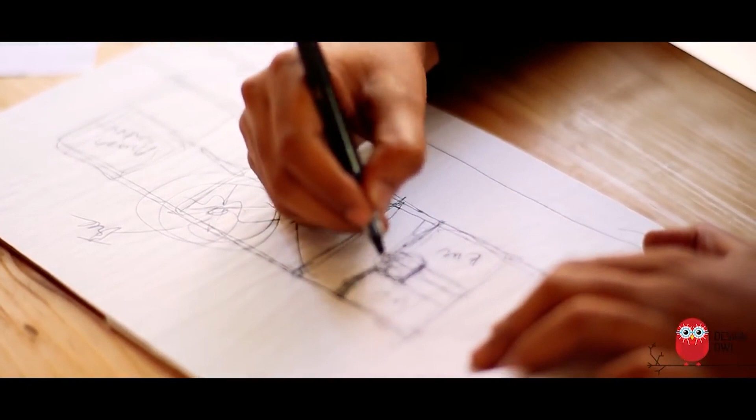The most sustainable architecture that we have resides in the villages, because there are no architects who go and design those buildings. It's just the users—they respond to the climate, they respond to their needs. So this whole prototype really responds to the city's needs.

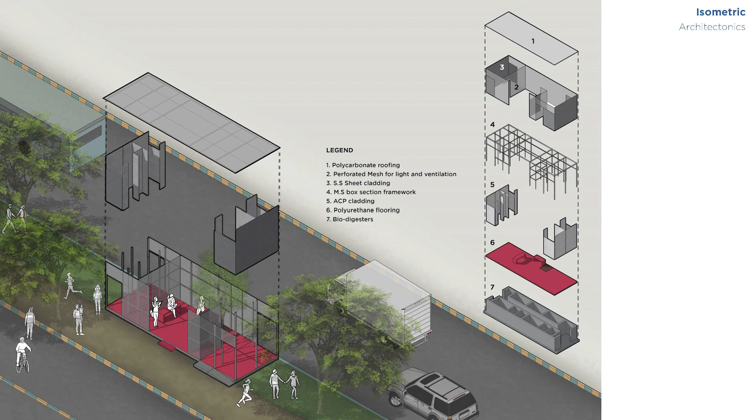This diagram here represents all the layers that went into making this prototype. Due to the success of the prototype, the corporation decided to build 14 more such units within the city, each within a radius of 500 meters from one another.

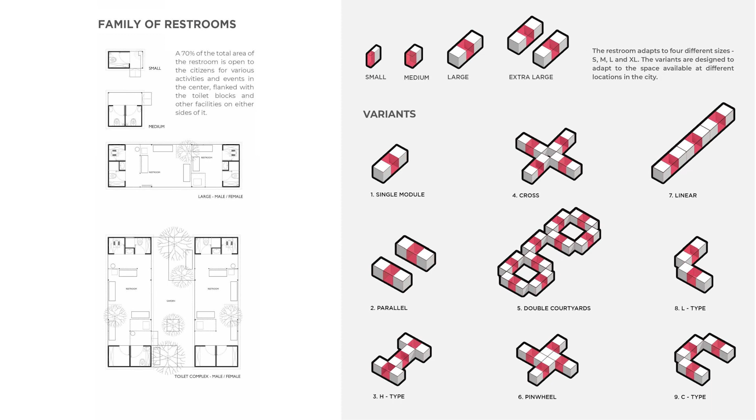As a result of these conversations, we decided to make a family of restrooms with small, medium, large and extra large variants. Based on the space available in cities, we could modulate each of these prototypes. The restroom variant could take many forms with the basic idea of a central garden comprising 70% of the total space. These variants could translate to any public facility the city needs, like a bus stop, a Gram Panchayat office, or a post office.

This resulted in another design for toilets, the Light Pavilion, with a similar kit of parts like the Lightbox. This prototype was designed for the local station platforms of Bombay, one unit on each platform of the suburban station. The proposal had a similar spatial narrative, like the Lightbox, with perforated metal and metal structure.

In India, community spaces often seem to be incidental. The stepwells and baolis, for example, serve as spaces designed to fetch water, but the elaborate architecture itself provides for conversations among its visitors. Our learnings from these spaces were about visibility, porosity, and the potential of design to provide for community interaction while catering to a simple function like fetching water or even using a public restroom.

The next project, Pause, is a building that sits as a marker along the Bombay-Goa highway, communicating visually to passersby. With multiple access points and signages allowing visitors to select their access points, with dedicated entry to the male toilet that streamlines the circulation, making it easy for maintenance.

The interiors are very porous with plants along the edge of the urinals. The openness allows the odor to escape and dries the toilets quickly. The entry to the female and differently abled toilet is close to the front facade, so they don't have to navigate deep into the site.

There is a similar planting detail along the edge of the basin and nursing station. The truck driver section has a Suvidha Kendra, tuck shop and a recreational space supported by toilets, washing and bathing spaces. The recreational space is semi-open with a charpai that makes the user comfortable to occupy this facility.

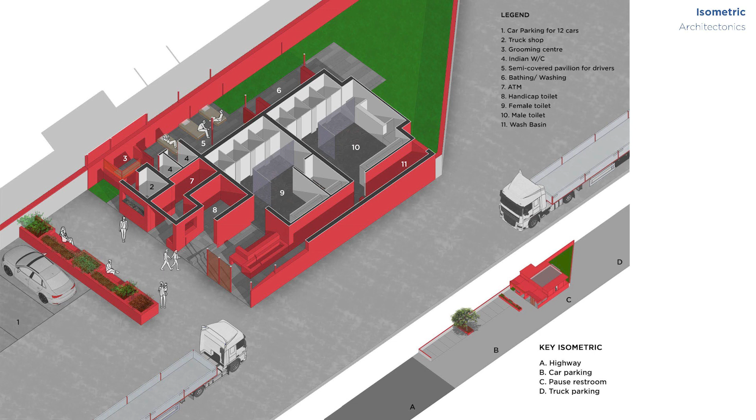The side elevation of this facility has a flamboyant facade where the form is responding to the function. The isometric here shows how all the activities interlock with one another in a manner that makes circulation easy for different user groups. This facility has a dedicated staff which looks after the building, which is a very important component for sanitation projects.

Another idea that emerged out of this narrative is a community sanitation prototype, which we had proposed for the smaller districts of Calcutta.

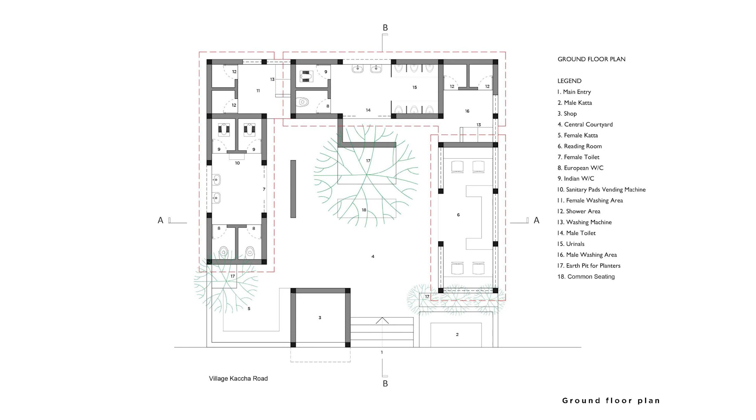Along with toilets, these prototypes would offer separate spaces for male and female for bathing, washing and drying clothes. A reading room with a central garden along with dedicated open spaces for men and women with a tuck shop facing the street. The open space links all the activities together.

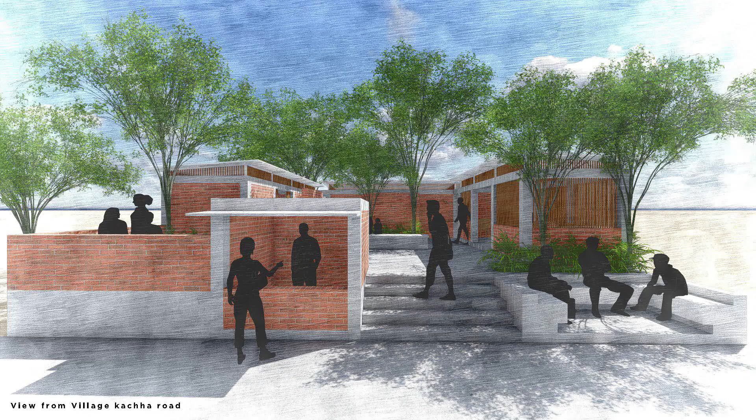In section, the roof gets detached from the walls to ensure good ventilation and lighting. The tuck shop forms the elevation towards the street, along with the steps and public spaces for men. After the public edge, one arrives into a garden surrounded by brick walls that has several access points.

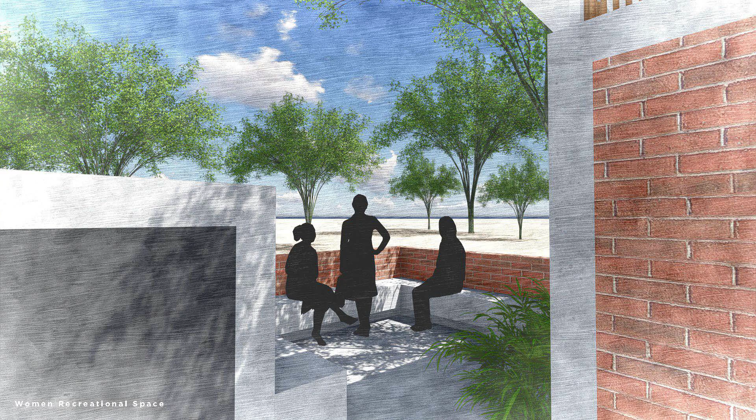The edge of the garden has a library or a reading room, a recreational space for women, and hidden access points to toilet blocks. All of these functions converge to the central garden, which also holds the floating population during peak hours.

The excerpt here is from an article called The Toilet, A Philosophy of Releasing by Jean Lee, where he talks about how architecture throughout history has been a rich expression of human lives, while the spaces for our releasing have been consistently dull, anonymous, and lacking artistic expression.

In this context, I would like to talk about the importance of addressing the user group in a sanitation project. A public toilet in a village, for example, which will be used by a community of farmers, would definitely be different architecturally from the one in a city.

We explored these ideas of responding to specific user groups to shape up the architecture and give the space a human-centric expression. We studied the truck drivers community as a user group and defined a proposal which would accommodate living and sanitation facilities for them.

The video shows the context in which truck drivers move constantly at a stretch of 22 hours with no pit stops and spaces to rest or rejuvenate.

In 1982, for every 1,000 trucks, there were 1,300 drivers available. This number reduced to 750 by 2012 and is predicted to come down to 450 by 2025.

This is a process of how the building was conceived. The site is divided into three parts and the triangular spaces are used for parking.

The middle space is used for a fuel station and an amenity building. The amenity building is a triangular form which is further divided into smaller squares, each forming a house that offers different activities: to eat, to relax, to recreate.

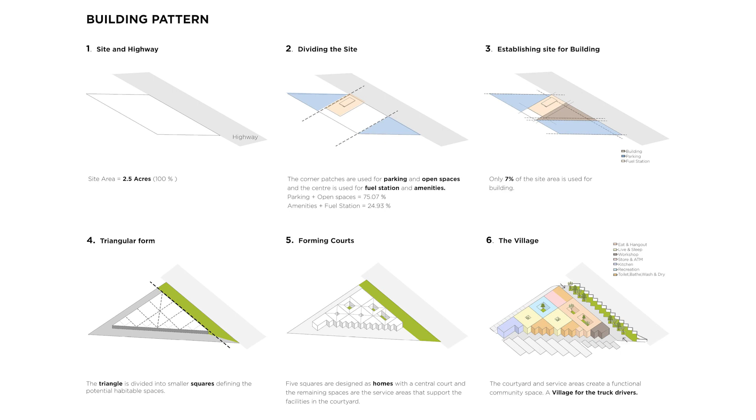This forms a collection of homes, a village for the truck drivers. The plan is a complex geometry that comprises many courtyards that hold all the supporting facilities.

The gardens inside the courtyards are designed with huge boulders and discrete vegetation to create a microclimate and to reference the landscape of Chitradurga, where the site is.

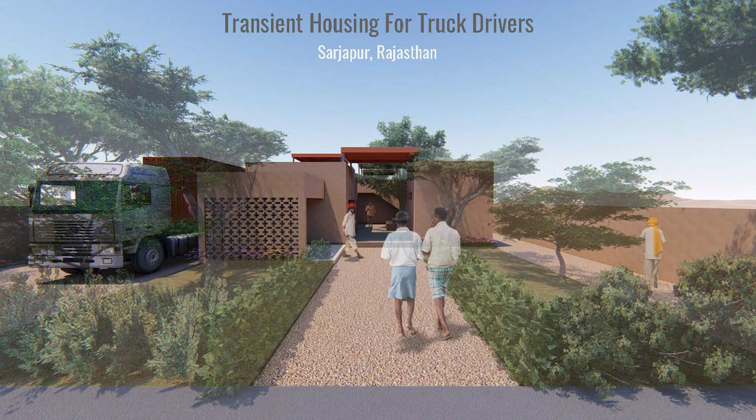The transient housing for truck drivers is an outcome of the facility we designed for Chitradurga. This project sits on a narrow plot measuring 50 feet by 500 feet in Rajasthan.

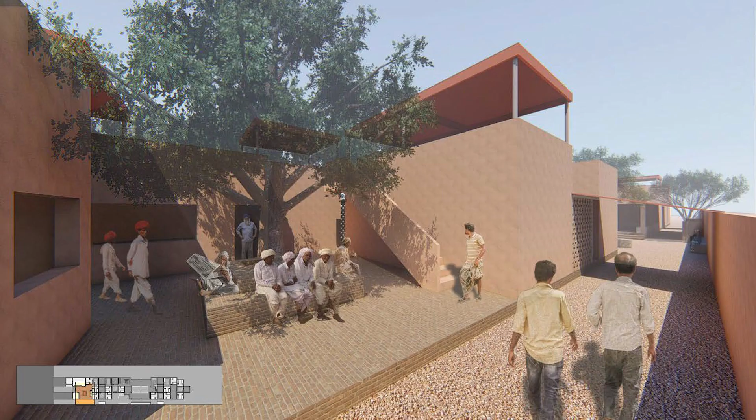At the front are common facilities for truck drivers and common people with a departmental store, grooming center and a tea stall. All these facilities sit around a courtyard that connects with the main spaces.

This court with a huge tree becomes a marker in space. The housing is laid in interlocking T-shaped units.

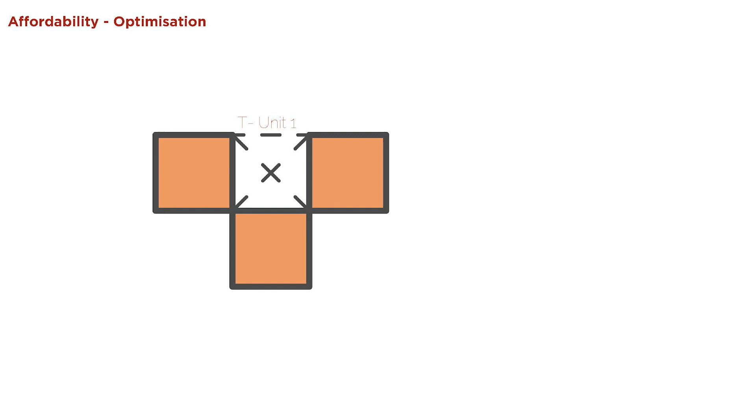Each unit is imagined as a T-shaped block with a common toilet. The other T unit then interlocks, and the units further expand with a common interlocking wall.

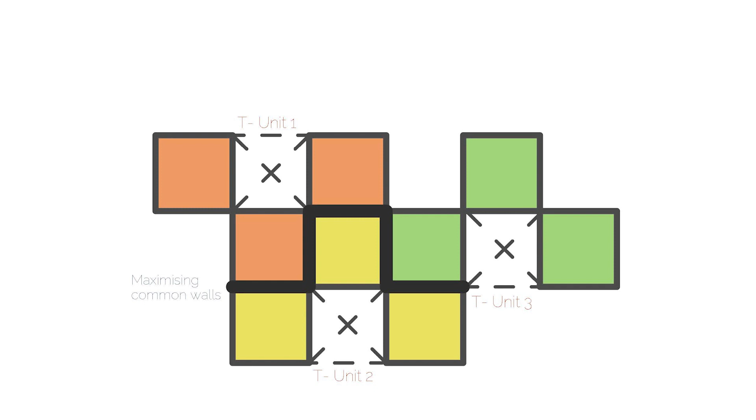This whole system is laid out in a pattern that creates a fabric suitable for the climate of Rajasthan. The courtyard inside each T unit is used as a common living space by the truck drivers, where they can share their travel stories with each other.

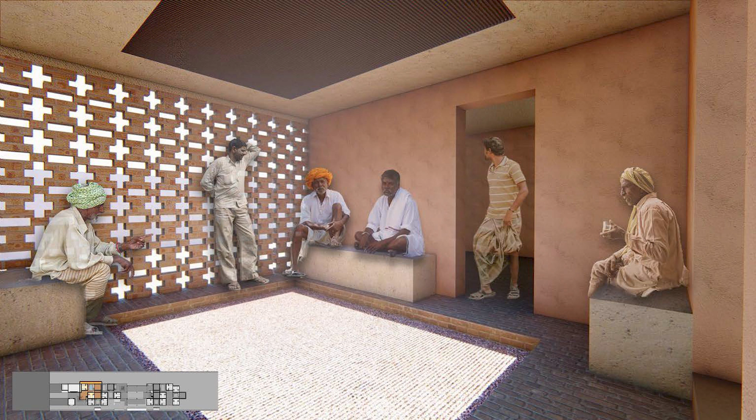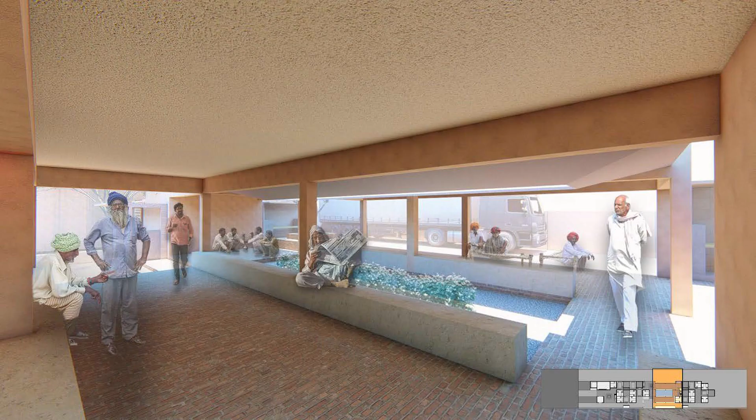The rooms with bunk beds are used as spaces to rest. The center of the complex is a common space that is used by the drivers as a chaupal, where they can hang out during the day over a cup of tea or snacks.

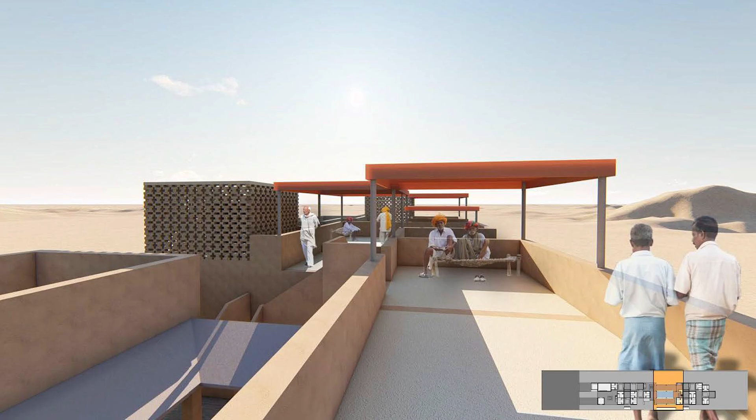The remaining areas are designed as recreational spaces for carom and cards. The rooftops are open for recreation and to sleep at night under the sky, and other common pockets for leisure.

I would like to end my talk by emphasizing that there is immense room for artistic exploration for designers in sanitation, once one stops looking at its components only through the lens of function and standardized norms. Thank you.